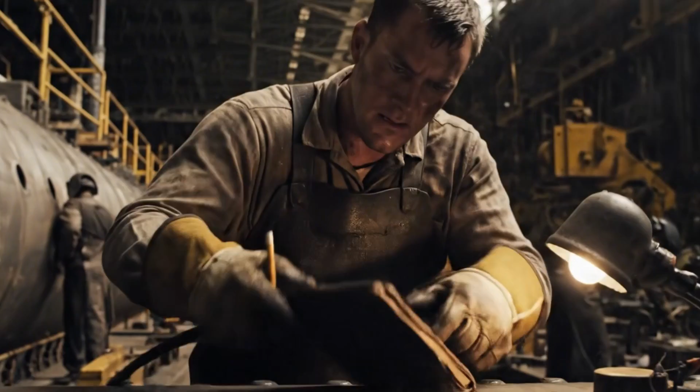"There has to be a better way. This is madness. The Navy supervisors kept telling me to work faster, but they refused to listen to my solution."

Through the maze of scaffolding beneath the wooden deck of a submarine under construction, he had just witnessed something that made his blood boil. A dozen workers spent an entire shift just to install a single section of deck planking. Enormous scaffolding structures filled the interior compartments below each wooden deck, with men working in cramped spaces, twisting nuts onto bolts that penetrated from above. Hours upon hours of labor just to secure wooden planks to steel frames.

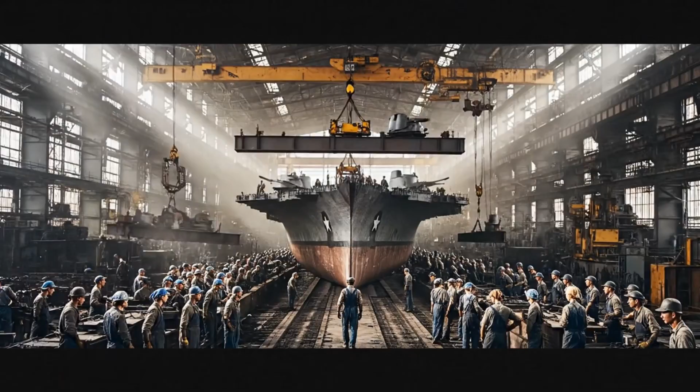The traditional method demanded precision, patience, and precious time that America did not have as war clouds gathered over the Pacific. Yet here, in what would soon become one of the busiest shipyards in the world, attachment methods were the same as they had been for decades.

Theodore Edward Nelson, 36 years old, California-born, had earned his mechanical knowledge the hard way. 15 years in machine shops across California, 15 years of learning how metal behaved, how electricity flowed, how problems could be solved if only someone would listen.

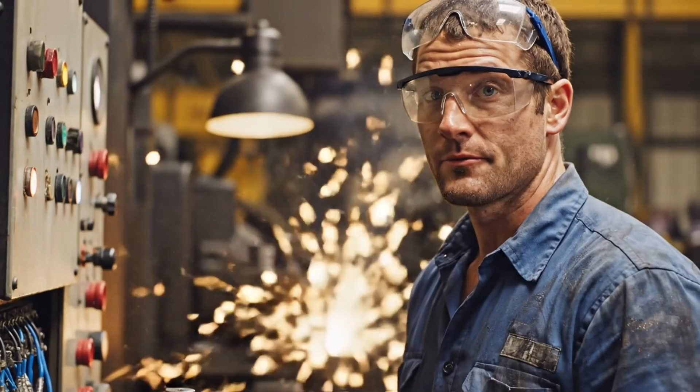What none of the Navy supervisors knew was that this frustrated welder had already solved their problem. And what Nelson did not yet know was that his simple solution, rejected and dismissed by his superiors, would soon save the United States Navy more than 50 million man-hours and fundamentally change naval construction forever.

The transformation had begun weeks earlier in the cramped interior spaces below decks, where the real war against inefficiency was being fought every single day.

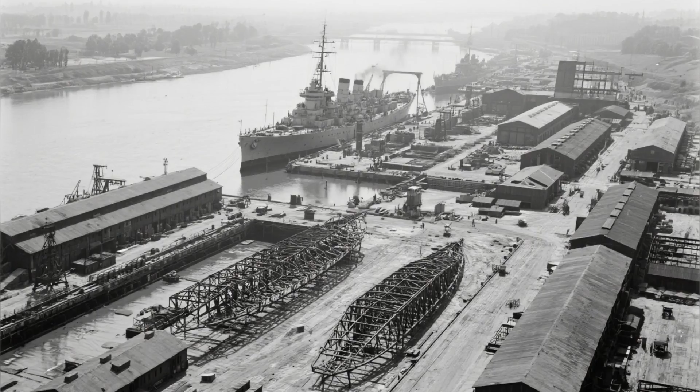The date was March 15th, 1941, 8 months and 22 days before Pearl Harbor. Mare Island Naval Shipyard stretched across 635 acres along the Napa River in Vallejo, California, 25 miles northeast of San Francisco. Founded in 1854 by Commander David Glasgow Farragut, it was the first United States Navy base established on the Pacific Ocean. By early 1941, Mare Island had evolved into the premier West Coast submarine construction facility.

The yard operated around the clock, 3 shifts of workers, 7 days a week. Submarine construction had accelerated dramatically as tensions mounted with Japan. The yard employed approximately 12,000 civilian workers in early 1941, a number that would eventually swell to nearly 50,000 by 1944.

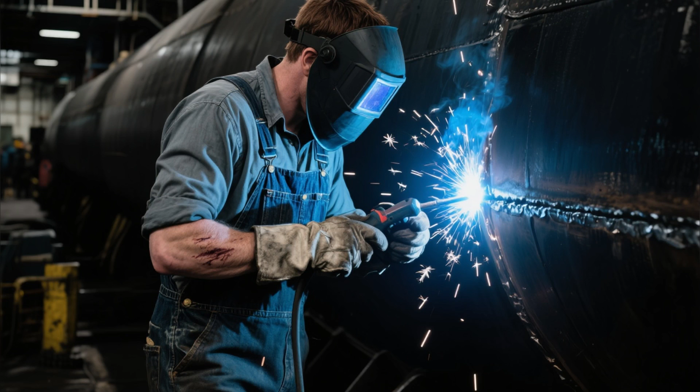Among those 12,000 workers was Ted Nelson, employee number 3,872. He earned $11 per day, working the day shift from 7 in the morning until 4 in the afternoon. His job was welding, primarily on submarine hulls and internal structures. He was good at his work, fast and precise, but increasingly frustrated by what he saw as wasteful inefficiency.

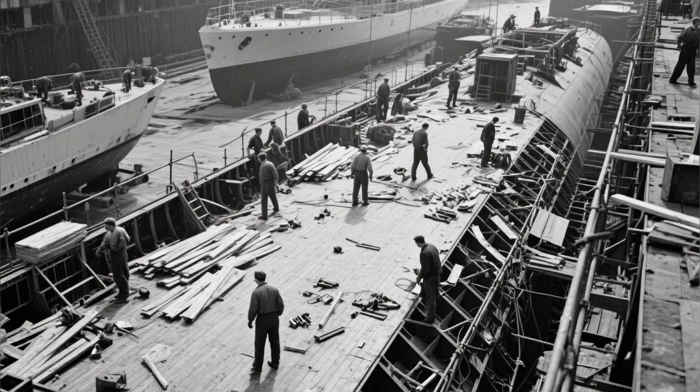The problem was everywhere he looked: wooden deck planking installation on submarines, destroyers, and aircraft carriers. The Navy specified wooden decks for several reasons. Wood provided better traction than steel in wet conditions, wood was quieter for crew movement, wood provided some insulation against the cold steel beneath, and in the event of fire, wooden decks could be more easily repaired or replaced than welded steel plates.

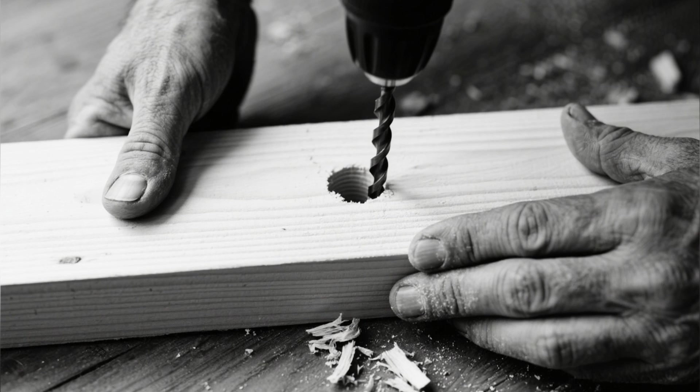But the installation method was archaic, labor-intensive, and painfully slow. The standard procedure, unchanged since the First World War, proceeded in a series of complicated steps. First, workers would drill holes through the wooden planks at precisely measured intervals. These holes would be countersunk to allow the heads of the attachment bolts to sit flush with the deck surface.

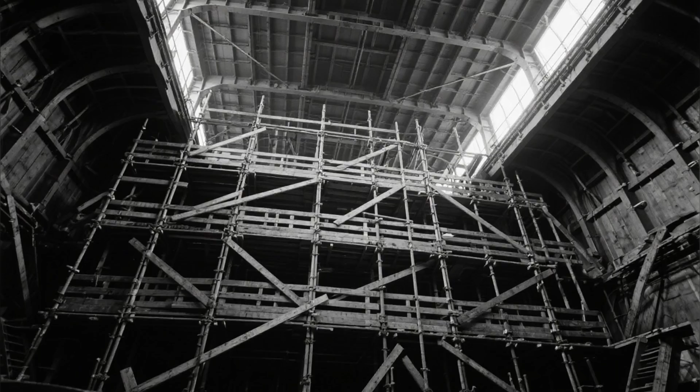Next, workers would position the planks on the steel deck framework. Then came the nightmare: workers had to construct extensive scaffolding beneath the deck inside the submarine or ship compartments. Multiple levels of platforms were required to give workers access to the underside of the steel deck framework. Once the scaffolding was in place, workers above and below would coordinate to insert long threaded bolts down through the wooden planks.

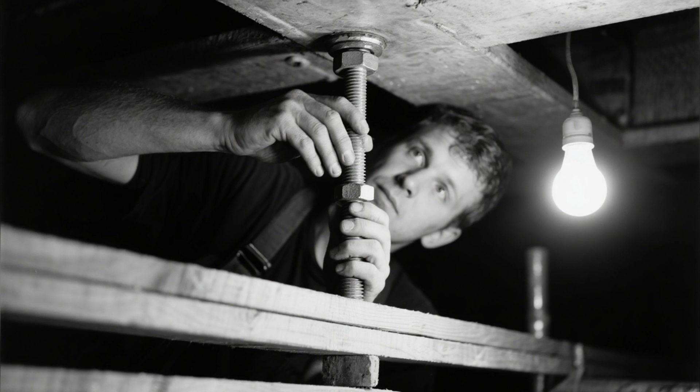And through corresponding holes in the steel framework, workers below, standing on scaffolding platforms in cramped, dark spaces, would thread nuts onto the protruding bolt ends. They would tighten these nuts with wrenches, pulling the wooden planks firmly against the steel framework above. Finally, workers topside would fill the countersink holes with wooden plugs, creating a smooth deck surface. The entire process was repeated for every section of decking on a submarine.

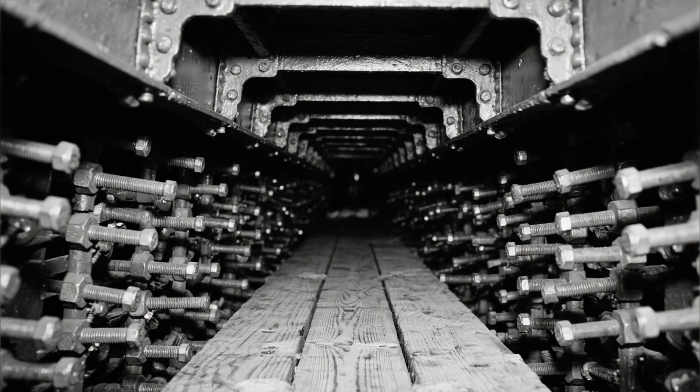There might be several hundred square feet of wooden decking requiring thousands of individual attachment points. On an aircraft carrier, the wooden flight deck covered tens of thousands of square feet. The labor requirements were staggering. A typical submarine deck installation required a crew of 12 to 16 men working for 5 to 7 days. The scaffolding alone took 2 full days to construct and another day to dismantle. The actual bolt installation consumed the remaining time.

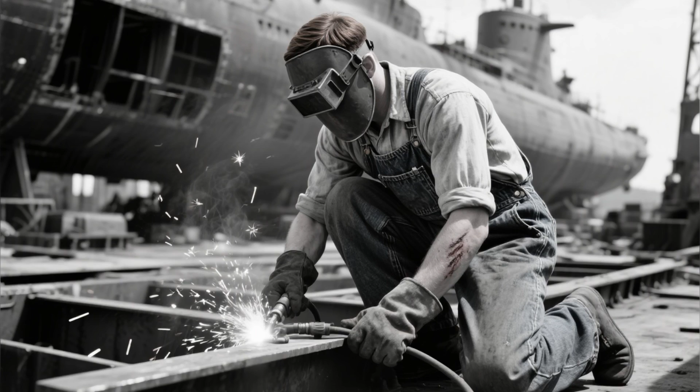Ted Nelson had performed this work dozens of times. He had spent countless hours standing on scaffolding platforms, threading nuts onto bolts in cramped submarine compartments barely 4 feet high. His back ached from the constant bending. His knuckles were scarred from slipped wrenches. His patience was exhausted, but more than personal discomfort drove his frustration.

He could see the bigger picture. War was coming. Everyone at Mare Island knew it. The yard was already behind schedule on submarine construction. The Navy needed boats in the water, not sitting in dry dock waiting for deck installation. Every day of delay was a day closer to a conflict America was not ready to fight. And Nelson knew there was a better way.

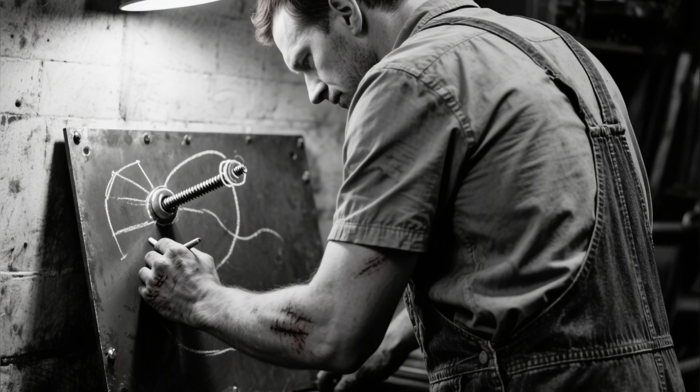He had been thinking about the problem for months, turning it over in his mind during the long hours of routine welding work. The solution seemed obvious to him. Instead of bolting from above and threading nuts from below, why not weld attachment studs directly to the steel framework? Weld from one side only, from above. No scaffolding required, no nuts and bolts, no workers cramped in compartments below, just fast, strong, permanent welds.

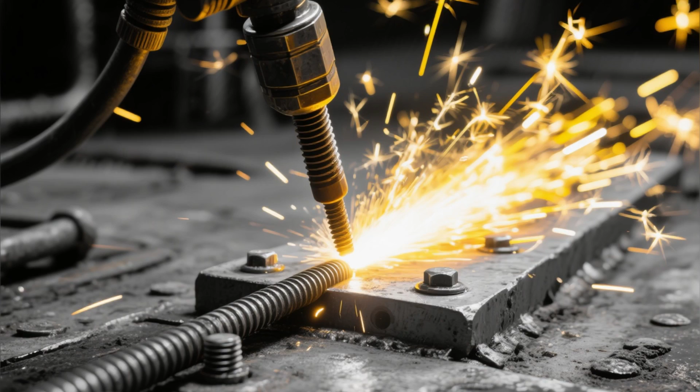The concept was simple. A threaded stud, essentially a headless bolt, could be welded to the steel deck framework in a fraction of a second. The wooden planks would have threaded inserts or specialized nuts to attach to these studs. The entire operation could be performed from the topside only. No scaffolding, no below-deck work, no coordination between crews above and below.

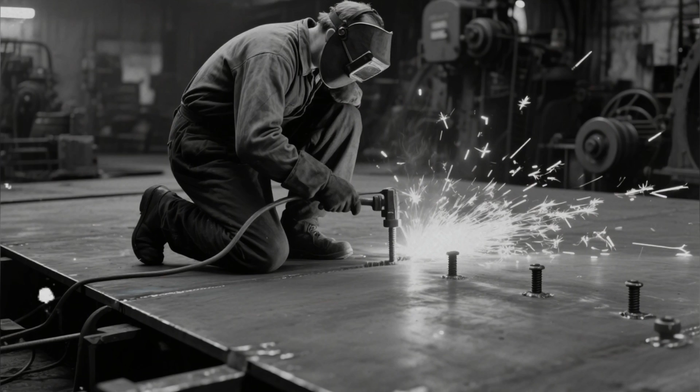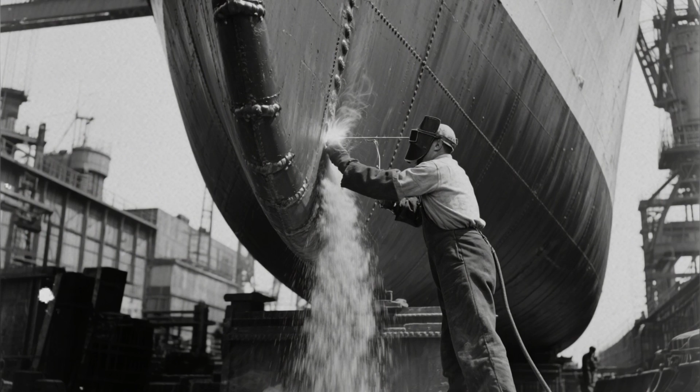Nelson had seen stud welding before in a limited form. The technology existed for horizontal flat plate welding. A small pile of flux powder would be placed on a flat steel surface. A stud would be positioned in the flux. An electrical arc would fuse the stud to the steel. But this method only worked on horizontal flat surfaces. The flux powder would simply fall off vertical or overhead surfaces, and naval construction required welding in all positions, vertical, horizontal, overhead, at all angles.

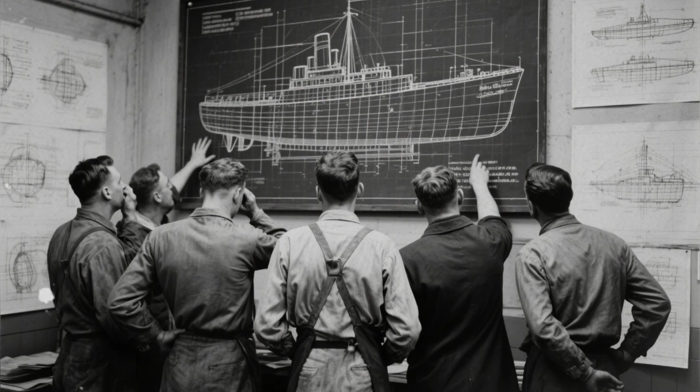This was the problem that had puzzled welding engineers for 20 years: how to make stud welding work on non-horizontal surfaces. Nelson thought he had the answer. It was so simple, he almost laughed when the solution came to him.

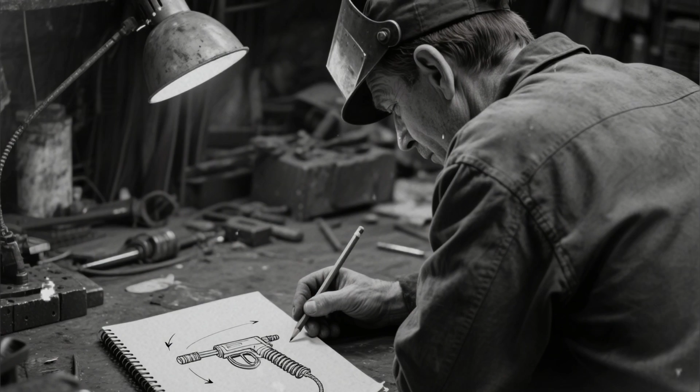Instead of loose flux powder, encase the flux in a small ceramic cap. Attach the cap to the end of the stud. The flux stays in place regardless of position. He sketched his idea in his notebook: a handheld welding gun, a spring-loaded mechanism to press the stud against the steel surface, an electrical trigger to create the welding arc, a disposable ceramic flux cap on the end of each stud. The whole operation would take less than 1 second per stud. One worker could install dozens of studs in the time it currently took to install a single bolted connection.

He took his idea to his supervisor, a Navy lieutenant named Morrison. The meeting lasted less than 5 minutes. Morrison barely looked at the sketches. "We have established procedures, Nelson. We follow Navy specifications. If you want to weld instead of supervising bolt installation, stick to your current assignments," he said. Nelson tried again, approaching the shipyard's chief welding engineer, a civilian contractor named Hartwell.

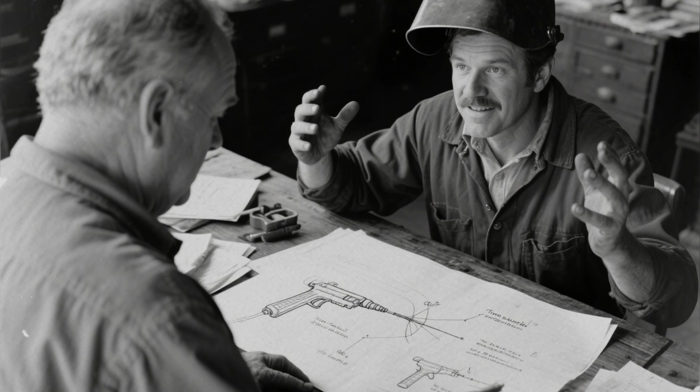He explained the time savings, the labor reduction, the elimination of scaffolding cost. Hartwell was more polite than Morrison, but equally dismissive. "Son, people a lot smarter than you and me have been trying to solve this problem for decades. If it was that easy, someone would have done it already. Besides, the Navy has specifications. We cannot just change procedures because a welder has an idea."

"You need approval from the Bureau of Ships in Washington. You need engineering studies. You need prototype testing. That takes years." "We don't have years," Nelson protested. "We need submarines now." Hartwell shrugged. "That's not my problem, Nelson. My problem is building boats according to approved specifications. Your problem is doing the welding work you're paid to do."

Nelson left the meeting angry and disillusioned. He had offered them a solution that could save thousands of hours per submarine.

They had dismissed him without serious consideration, not because his idea was flawed, not because it wouldn't work, but because he was just a welder, because changing procedures required paperwork and approvals, because innovation was less important than following established protocols.

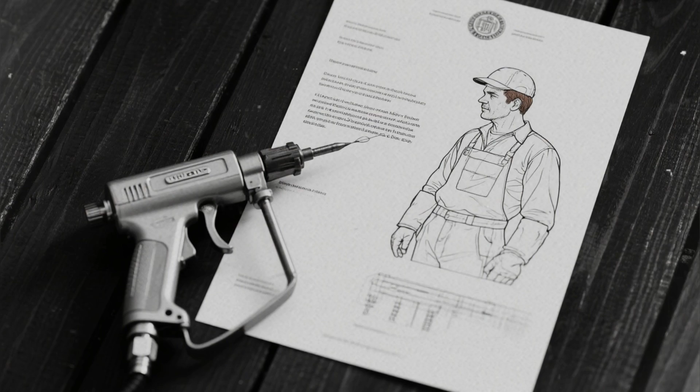He made one more attempt, writing a formal letter to the shipyard commander, Captain Thomas Withers. The letter was carefully composed, explaining the current inefficiency, proposing the stud welding solution, estimating time and cost savings. He submitted it through proper channels, following the established procedure for worker suggestions.

Three weeks later he received a reply, a form letter thanking him for his interest in improving shipyard efficiency, a polite explanation that all technical proposals were evaluated by the Bureau of Ships Engineering Review Board, a notation that his suggestion had been forwarded for consideration, a realistic assessment that the review process typically took 18 to 24 months. He would be notified if his proposal was approved for further study.

18 to 24 months. By then, the war might already be over or lost. Nelson crumpled the letter and threw it in the waste bin. That evening, he made a decision that would change his life and alter the course of naval history. If the Navy wouldn't listen, he would build it himself. He would prove his concept worked. Then they would have to pay attention.

He cleared a space in the garage behind his small cottage in Vallejo. His wife Emma watched with concern as he began collecting scrap steel and welding equipment. "Ted, you're going to get yourself fired," she warned. "You're supposed to be working on Navy projects, not your own inventions." "This will help the Navy," he replied. "They just don't know it yet."

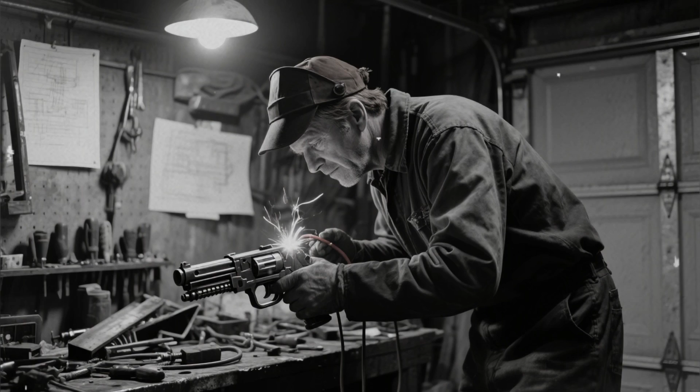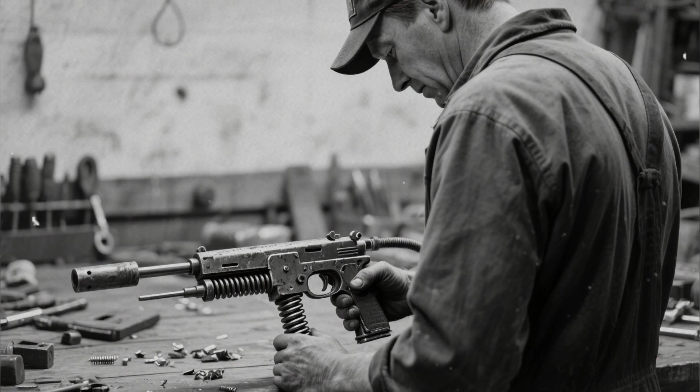Over the following weeks, working evenings and weekends, Nelson constructed his first prototype stud welding gun. The design was crude but functional: a pistol grip handle, a spring-loaded plunger to hold and press the stud, an electrical trigger connected to a welding power supply, and a quick-release mechanism to load new studs.

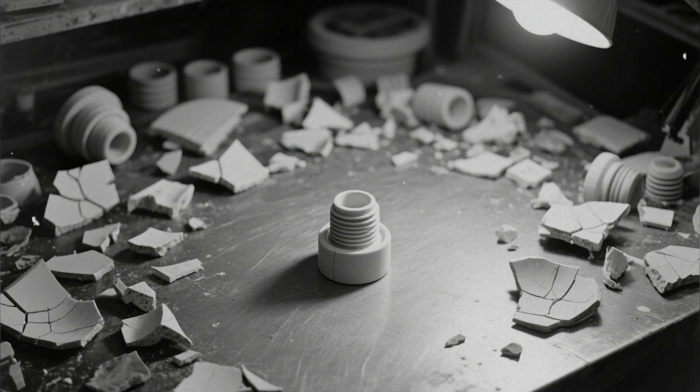The most critical innovation was the flux cap. He experimented with different ceramic materials, different flux compositions, and different cap designs. After dozens of tests, he developed a cap that held the flux securely, allowed proper arc initiation, and could be manufactured cheaply. By May 1941, he had a working prototype.

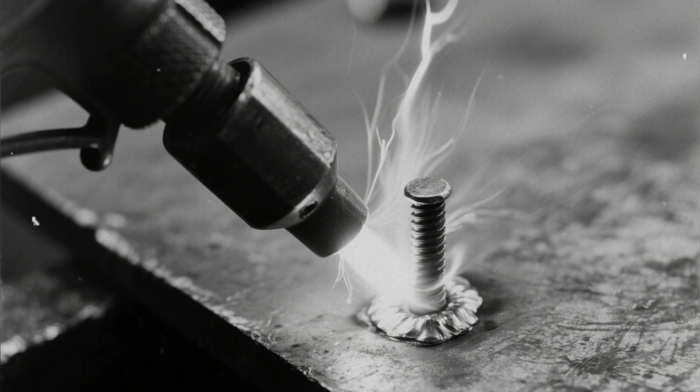He tested it on scrap steel in every position imaginable: horizontal, vertical, overhead, and angles. The gun worked flawlessly. A stud could be welded in less than one second. The weld strength exceeded that of traditional through bolts, and most importantly, it required no below-surface access.

He brought the prototype to work and demonstrated it to several fellow welders during lunch break. They were impressed and excited. "This is going to save us so much time," one remarked. "You need to show this to Morrison," another suggested. Nelson shook his head. "I already showed Morrison. He wasn't interested." "Then quit and start your own company," a third welder advised.

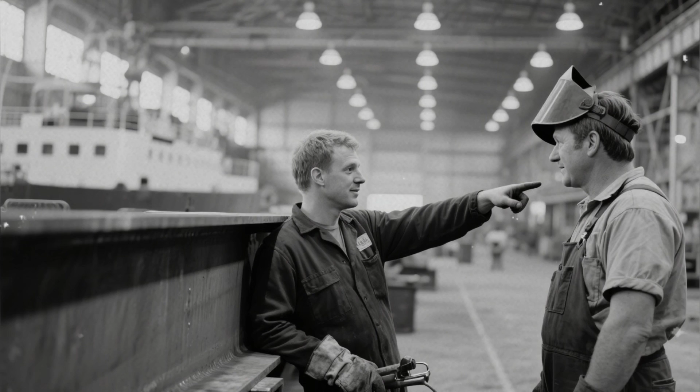"Sell your gun to shipyards across the country. You'll make a fortune." The idea had not occurred to Nelson. He was a welder, not a businessman. He had no capital, no manufacturing facility, no business experience. But the more he thought about it, the more sense it made. If the Navy wouldn't use his invention, maybe private shipyards would.

The Kaiser shipyards in Richmond were hiring. The Bethlehem Steel Shipyard in San Francisco was expanding. There were shipyards up and down the West Coast, all facing the same labor shortages and production pressures. On June 20th, 1941, Ted Nelson submitted his resignation to Mare Island Naval Shipyard.

His supervisor tried to talk him out of it. "Nelson, you're a good welder. Don't throw away a steady job for some crazy invention." But Nelson's mind was made up. "I'm going to build welding guns," he told Morrison. "And when the Navy comes back asking to buy them, I hope you remember this conversation."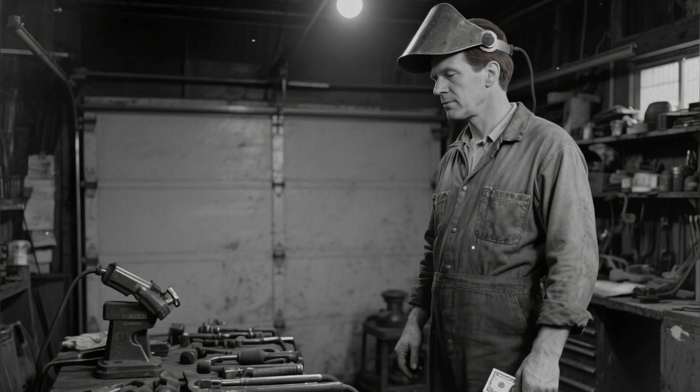He left Mare Island with $11 in his pocket, a garage full of tools, and a conviction that his invention would succeed. He incorporated the Nelson Specialty Welding Equipment Corporation on July 1st, 1941. He borrowed $95,000 from the Reconstruction Finance Corporation, a government lending agency established during the Depression to support small businesses. With that capital, he rented a small workshop in Vallejo and began manufacturing stud welding guns.

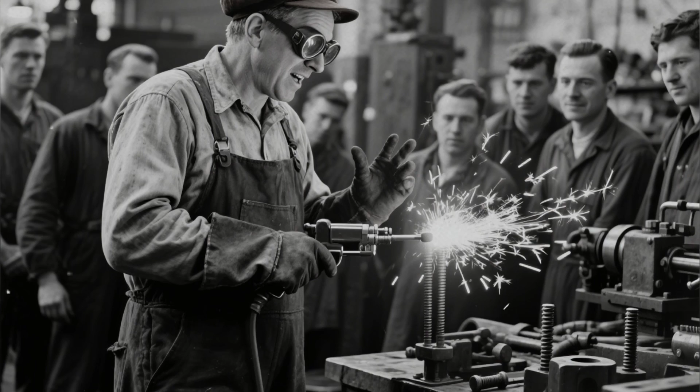The first months were difficult. He had no customers, no reputation, no distribution network. He made sales calls to local machine shops and small fabrication companies, demonstrating his gun and explaining the time savings. Most were skeptical. A few were interested enough to try a demonstration unit. Slowly, very slowly, orders began to come in.

By September 1941, he had sold 18 welding guns and several thousand flux cap studs. Then, on December 7, 1941, everything changed. Pearl Harbor. The Japanese attack destroyed or damaged 8 battleships, 3 cruisers, 3 destroyers, and 188 aircraft. 2,403 Americans died. The United States was at war.

Suddenly, shipbuilding was not just important, it was a matter of national survival. Within days of Pearl Harbor, the shipbuilding industry exploded into frantic activity. The Kaiser shipyards began building Liberty ships at an unprecedented pace. Mare Island Naval Shipyard received emergency orders for submarine construction. Bethlehem Steel and other private yards started working triple shifts. And every single one of these facilities faced the same problem: how to build ships fast enough. The traditional methods were too slow, too labor-intensive, too wasteful of precious time.

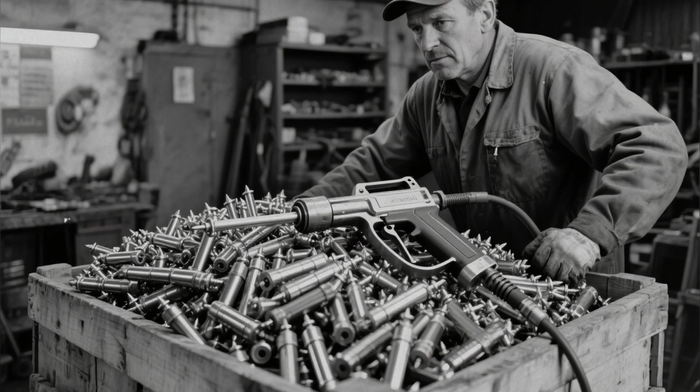Ted Nelson's phone began ringing. Shipyard purchasing agents who had dismissed his invention weeks earlier now wanted to place large orders. The Kaiser shipyards ordered 50 welding guns and 10,000 studs. Bethlehem Steel ordered 40 guns. Even Mare Island Naval Shipyard, where he had been rebuffed just months earlier, placed an order for 60 guns and 20,000 studs. Morrison, his former supervisor, handled the purchase requisition. There was no apology, no acknowledgement that Nelson had been right, just a terse official order and a request for prompt delivery.

By January 1942, less than 1 month after Pearl Harbor, Nelson's small workshop could not keep up with demand. He was receiving orders faster than he could manufacture products. He needed a real factory, more workers, better equipment. He leased a larger facility in San Leandro, a few miles south of Oakland. The building sat in the middle of a cornfield, isolated and unimpressive, but it had space, power, and room for expansion.

By March 1942, he employed 20 workers. By June, 50. By September, 150. The factory operated around the clock, 7 days a week. Welding guns rolled off the assembly line at a rate of 30 per day. Stud production reached thousands per day.

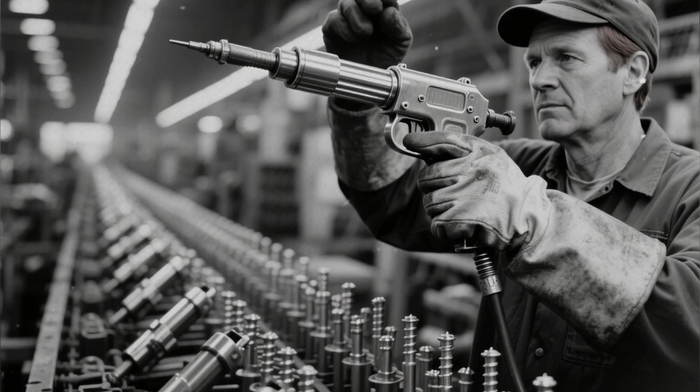Every major shipyard on the West Coast was now using Nelson's stud welding equipment, and the reports coming back were extraordinary. A submarine deck installation that previously required 12 workers in 6 days could now be completed by 3 workers in 1 day. The elimination of scaffolding saved 2 additional days and freed workers for other tasks. The welds were stronger than traditional bolted connections. The wooden deck planks could be removed and replaced more easily for maintenance or repair.

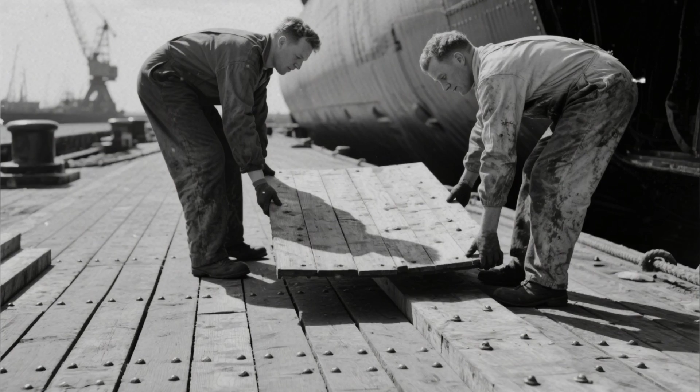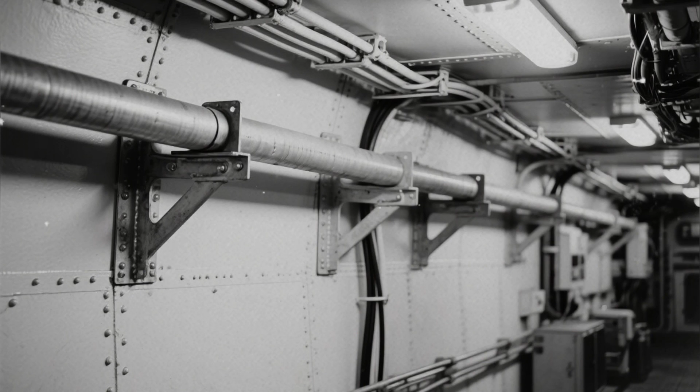At Mare Island Naval Shipyard, submarine construction accelerated dramatically. The yard completed 17 submarines between 1941 and 1945, with an average construction time that steadily decreased as new techniques were implemented. Stud welding was not the only innovation, but it was a critical piece of the efficiency puzzle. By mid-1942, stud welding was being used not just for deck attachment, but for dozens of other applications: pipe hangers, cable supports, equipment mounts, bulkhead attachments. Any situation where a fastener needed to be attached to a steel structure, stud welding provided a faster solution.

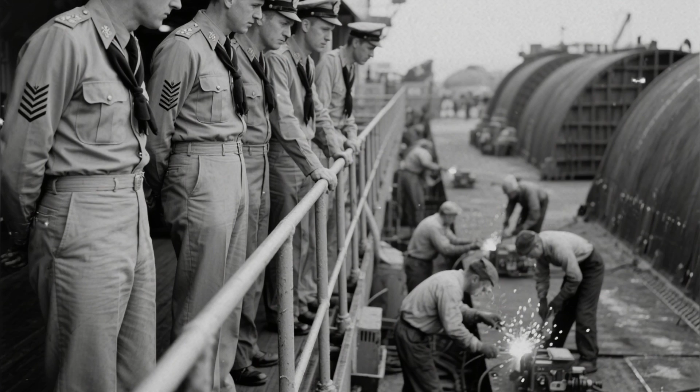The Navy Bureau of Ships, which had initially ignored Nelson's proposal, now studied his process intensively. Engineering teams analyzed weld strength, durability, and failure modes. The results confirmed what Nelson had known all along. His welds were not just faster than traditional methods, they were actually superior in strength and reliability.

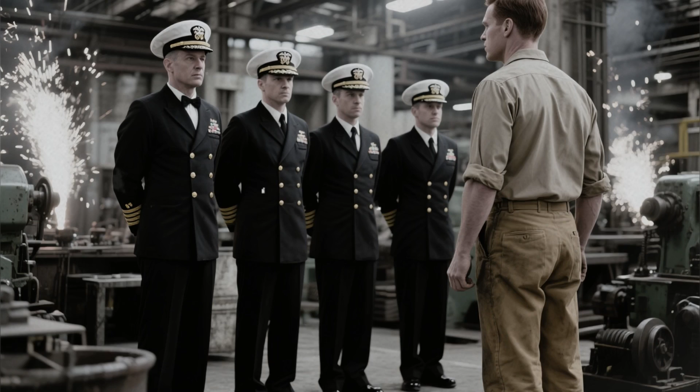On November 19, 1942, just 11 months after leaving his $11 a day welding job, Ted Nelson received a formal visit from a delegation of Navy officers. They came to his San Leandro plant unannounced, a group of 4 men in dress uniforms. Captain Harrison, representing the Bureau of Ships, did the talking.

"Mr. Nelson, we are here to inform you that the Navy has completed an evaluation of your stud welding process. We have determined that your invention has saved the United States Navy an estimated 5 million man-hours in submarine and surface ship construction over the past 10 months. That number is expected to increase substantially as more shipyards adopt your technology." He paused, then continued. "On behalf of the Secretary of the Navy and the United States government, I am authorized to present you with a citation for exceptional contribution to the war effort."

Nelson was stunned. They had rejected his idea. They had ignored his proposals. They had forced him to quit his job and risk everything to prove his concept. And now they were giving him a citation.

Captain Harrison must have seen the conflict on Nelson's face.

"I understand you submitted a proposal to Mare Island in early 1941, Nelson. I have reviewed that file. Your proposal was not properly evaluated at the time. That was a mistake, and I apologize on behalf of the Navy. However, your decision to develop the technology independently has resulted in faster deployment than would have been possible through the normal procurement process. Sometimes the best way to serve your country is to ignore official channels and just solve the problem."

Nelson accepted the citation with mixed emotions: pride in his achievement, vindication for his perseverance, but also frustration at the bureaucracy that had nearly prevented this innovation from happening.

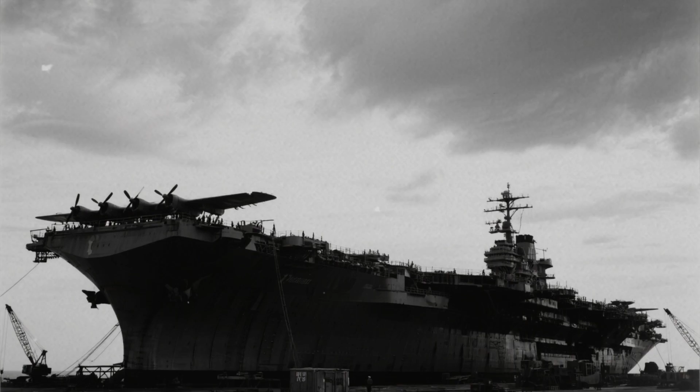The war continued. Production demands increased. Nelson's company expanded again, opening a second manufacturing facility in Camden, New Jersey in March 1943. This East Coast plant supplied shipyards in New York, Philadelphia, Norfolk, and Charleston. By mid-1943, Nelson's Specialty Welding Equipment Corporation employed over 400 workers and generated annual revenue of approximately $4 million.

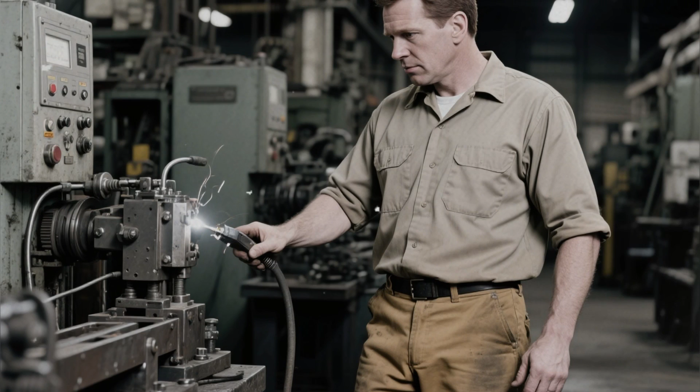Nelson still spent 16 hours a day in the factory, still dressed in shop workers' tan pants and shirts, still drew a modest salary of $1,000 per month. All profits were reinvested in expansion, equipment, and loan repayment. But his impact on the war effort was incalculable.

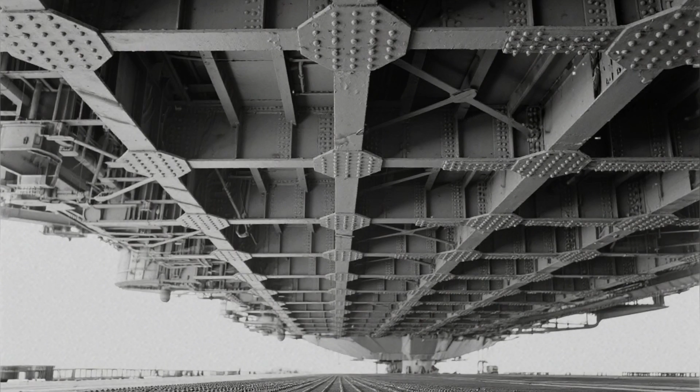The Navy's estimate of 5 million man-hours saved by late 1942 was just the beginning. As the war progressed and stud welding became standard practice across all naval construction, the time savings multiplied exponentially. By 1943, stud welding was being used not just on submarines, but on aircraft carriers, battleships, cruisers, destroyers, and hundreds of smaller vessels. The Essex-class aircraft carriers, built by Newport News Shipbuilding and other yards, used Nelson's stud welding extensively for flight deck attachment and interior fittings.

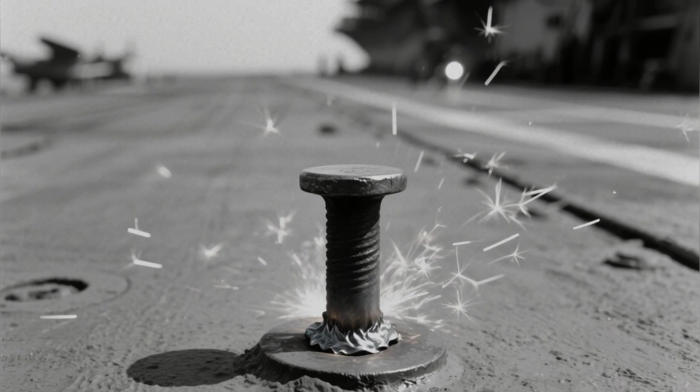Each carrier required approximately 20,000 studs. The Navy built 24 Essex-class carriers during the war. The Iowa-class battleships used stud welding for deck planking, equipment mounts, and armor attachment. The Baltimore-class heavy cruisers incorporated the technology throughout. Destroyer escorts, landing ships, patrol boats, every type of naval vessel benefited from faster, stronger attachment methods.

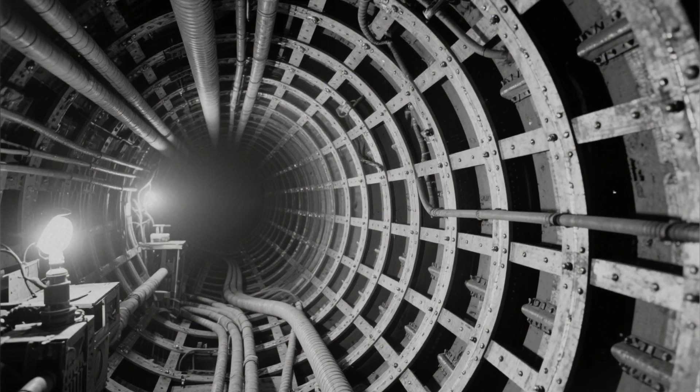But the most dramatic impact was in submarine construction. Mare Island Naval Shipyard, where Nelson had worked and where his idea had been rejected, became one of the most efficient submarine builders in the world. The yard built 17 submarines during the war, with steadily improving construction times. Portsmouth Naval Shipyard in New Hampshire became the champion submarine builder, completing 79 submarines between July 1940 and July 1945.

Portsmouth's success was built on multiple innovations, but stud welding was a critical enabling technology. The yard adopted Nelson's system extensively, using it not just for decking, but throughout the boat's interior. The result was visible in construction statistics. Portsmouth launched 3 submarines simultaneously on January 27, 1944: the Redfish, Ronquil, and Razorback. A 4th submarine, Scabbardfish, launched the same day. Four submarines in one day, no shipyard before or since has matched that achievement.

At the peak of production, Portsmouth completed 30 submarines in 1944, approximately 1 submarine every 11 days. The Balao-class submarines, which made up the bulk of wartime production, averaged 12 months from keel laying to commissioning at Portsmouth. This was several months faster than other yards building the same class.

Electric Boat Company in Groton, Connecticut, built 74 submarines during the war. Manitowoc Shipbuilding in Wisconsin, despite being on the Great Lakes hundreds of miles from the ocean, built 28 submarines that were floated down the Mississippi River to the Gulf of Mexico. Across all yards, the United States built 203 submarines during World War II.

Each submarine required thousands of stud-welded attachments. Each stud saved minutes of labor time. Multiply those minutes by thousands of studs per submarine, by hundreds of submarines, and the time savings reached staggering proportions. But submarines were only part of the story. The real volume was in surface ships and merchant vessels.

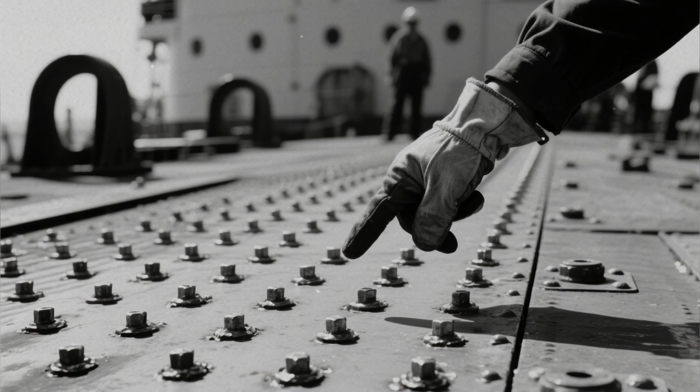The Liberty Ship program, managed by the Maritime Commission and built primarily at Kaiser shipyards, produced 2,710 cargo ships during the war. Each Liberty ship required approximately 5,000 to 8,000 stud-welded attachments for deck planking, cargo handling equipment, defensive gun mounts, and ship fittings. The Victory ships, a faster and more advanced design, were built to similar standards. The scale of production was unprecedented in human history.

At the peak of Liberty ship construction in 1943, American shipyards launched 3 new ships every day, 75 ships per month, 900 ships per year. This was possible only through radical innovations in construction methods: prefabrication, modular assembly, specialized workers, dedicated tools, and faster attachment methods. Stud welding was one piece of a larger revolution in shipbuilding efficiency, but it was a critical piece. The elimination of scaffolding freed workers for other tasks.

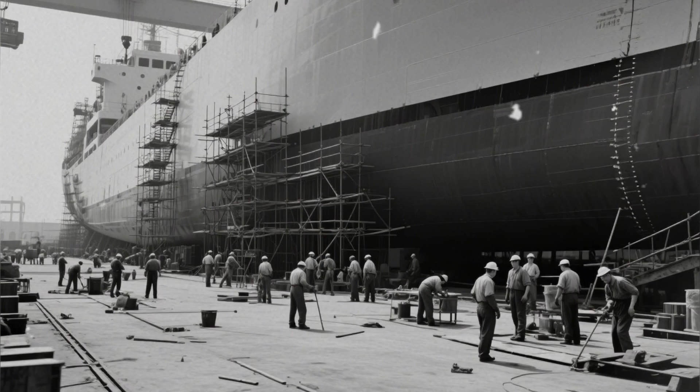The speed of installation reduced assembly time. The strength and reliability of the welds ensured that these hastily built ships could survive North Atlantic storms and enemy attacks. By the spring of 1943, the United States Navy had taken formal notice of Nelson's contribution.

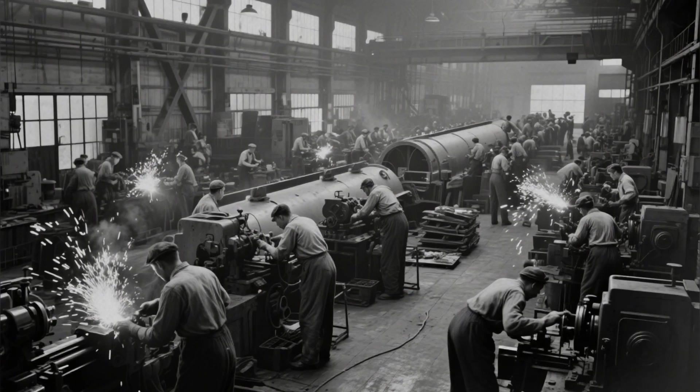On May 11, 1943, the Secretary of the Navy presented the Nelson Specialty Welding Equipment Corporation with the Army Navy E Award for Excellence in Production. The E Award was created in July 1942 to recognize companies whose production facilities achieved outstanding performance in manufacturing war equipment. Excellence in quality and quantity were the determining factors. Only about 5% of companies engaged in war work received this honor.

The award consisted of a pennant for the factory and individual pins for all employees. The ceremony was held at the San Leandro plant with full military honors. Navy officers, Army representatives, and local officials attended. The factory workers, Nelson's employees, who had worked grueling hours to meet production demands, received their pins with pride.

Ed Nelson, standing before his workers in his usual shop clothes, accepted the pennant and gave a brief speech: "We didn't do this for awards or recognition. We did this because our country needed it. Every stud we make, every gun we build, helps bring our sailors and soldiers home safely. That's all the reward we need."

But the Navy was not finished recognizing Nelson's achievement. Plants that maintained outstanding performance for 6 months after receiving the initial E Award were granted a star to add to their pennant. The Nelson Company earned its first star in November 1943. The second star came in May 1944. By the end of the war, the Nelson Specialty Welding Equipment Corporation had earned 2 E Awards with stars, one of only a handful of companies to achieve this distinction.

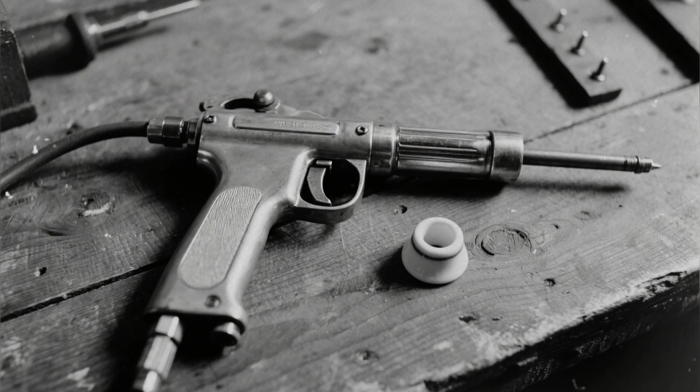The time savings translated directly into ships in the water faster. More submarines hunting Japanese convoys, more destroyers escorting convoys, more aircraft carriers launching strikes, more landing ships delivering Marines to hostile beaches. Every ship delivered faster meant more combat power, more supplies delivered, more lives saved. The strategic impact was incalculable.

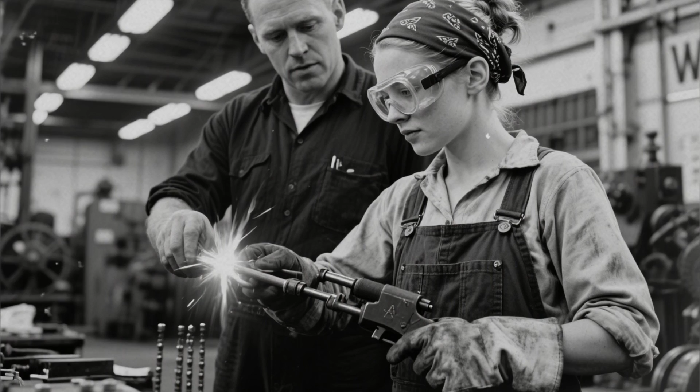But Nelson's invention had another unexpected benefit. The stud welding process required less skill than traditional bolt installation or conventional welding. With minimal training, new workers could perform stud welding operations safely and effectively. This was crucial as the war progressed and labor shortages intensified.

Women entered the shipyards in unprecedented numbers. The famous Rosie the Riveter symbolized female shipyard workers, but there were also Wendy the Welders. Women operated stud welding guns, installed deck planking, mounted equipment. Many became highly skilled at the process.

Mare Island Naval Shipyard, at its peak, employed almost 50,000 workers, including 9,000 women. Kaiser shipyards employed hundreds of thousands, with women making up nearly 30% of the workforce. These women needed tools and processes that could be learned quickly and performed safely. Stud welding fit that requirement perfectly.

By 1944, the tide of war had turned decisively in favor of the Allies. American industrial production overwhelmed Axis capabilities. The United States built more ships, planes, tanks, and guns than Germany and Japan combined. The arsenal of democracy, as President Roosevelt called it, operated at full capacity.

Ed Nelson's stud welding guns were a small part of this massive industrial achievement. But small parts matter. In war, efficiency is measured in lives saved and battles won. Faster ship construction meant more naval power deployed sooner. More naval power meant more Japanese shipping sunk, more islands taken, more pressure on the enemy.

The submarine campaign in the Pacific demonstrated this clearly. American submarines sank over 1,000 Japanese merchant ships, totaling approximately 5 million tons. They also sank 8 aircraft carriers, 1 battleship, and numerous cruisers and destroyers. This success was possible only because America built submarines faster than Japan could sink them.

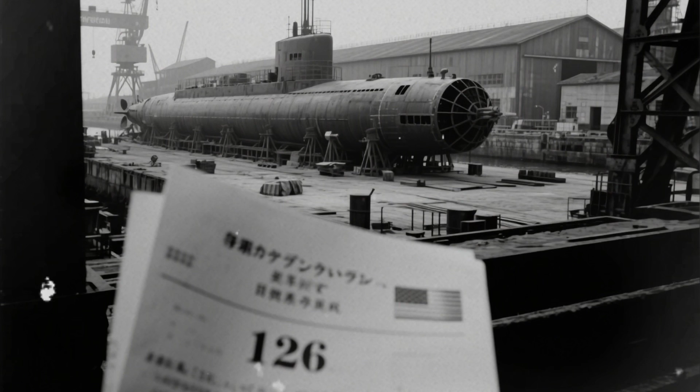Japan began the war with a larger submarine fleet than the United States, but Japan built only 126 submarines during the war. America built 203. Every month of accelerated construction mattered. Every week a submarine reached the fleet sooner meant another week hunting enemy shipping. The Essex-class aircraft carrier program showed similar patterns. The United States Navy had 7 aircraft carriers in December 1941.

By August 1945, the Navy had 99 aircraft carriers of all types. The Essex-class fleet carriers formed the backbone of this force. 24 were completed, each carrying up to 90 aircraft.

The fast carrier task forces built around Essex-class carriers dominated the Pacific. From mid-1943 onward, these ships shelled Japanese positions, launched airstrikes, provided air cover for amphibious landings, and engaged Japanese naval forces in decisive battles. The Battle of the Philippine Sea in June 1944 saw American carrier aircraft destroy over 600 Japanese planes in what pilots called the Great Marianas Turkey Shoot.

This victory was possible only because America had more carriers in the right place, at the right time. Faster construction enabled faster deployment.

The D-Day invasion of Normandy on June 6, 1944, required 7,000 ships and landing craft. This armada, the largest amphibious assault in history, was possible only because American and British shipyards built landing craft by the thousands. The landing ships were crewed vessels, flat-bottomed boats designed to run up on beaches and discharge cargo, but they required rapid construction and reliable fittings.

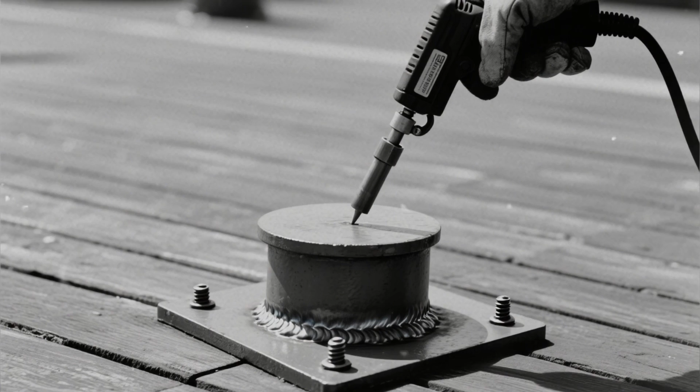Stud welding proved ideal for landing craft construction. Cargo ramps, davit mounts, deck fittings all could be installed quickly and securely. Nelson's technology, invented for submarine deck attachment, found applications throughout the landing craft fleet.

After V-E Day in May 1945, attention shifted fully to the Pacific. The planned invasion of Japan, Operation Downfall, was scheduled for November 1945. The operation would require more ships, more landing craft, more logistics support than any previous campaign. Shipyards prepared for another surge in production.

Then, on August 6 and 9, 1945, atomic bombs destroyed Hiroshima and Nagasaki. Japan surrendered. On August 15, 1945, World War II ended. The massive military production machine began winding down. Contracts were canceled, workers were laid off, and shipyards closed or converted to peacetime production.

The Nelson Specialty Welding Equipment Corporation faced an uncertain future. Military orders dried up almost overnight. The company, which had employed over 400 workers at its peak, now faced potential collapse.

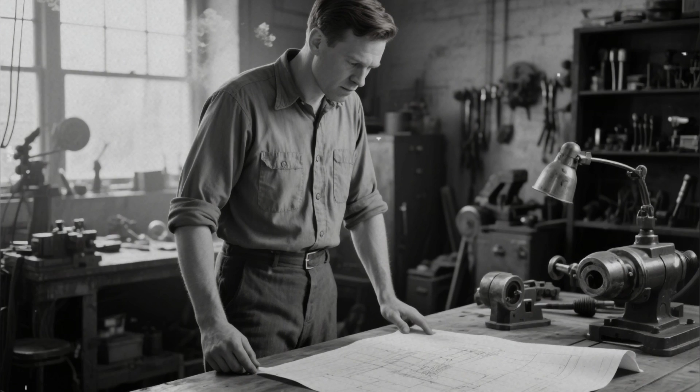But Ted Nelson had prepared for this moment. During the war years, he had been thinking about peacetime applications for stud welding. The technology was not limited to shipbuilding. Any industry that fabricated steel structures could benefit from faster attachment methods: construction, bridges, buildings, tanks, pressure vessels, automotive. The possibilities were extensive. Nelson pivoted to civilian markets.

He marketed his stud welding systems to construction companies, steel fabricators, and industrial manufacturers. The post-war construction boom provided new opportunities. America was building highways, bridges, skyscrapers, and suburbs, all of which required steel fabrication and attachment.

By 1948, Nelson's company had successfully transitioned to peacetime production. The business was smaller than during wartime, but stable and growing. The company continued to innovate, developing new stud designs, improved welding guns, and specialized applications.

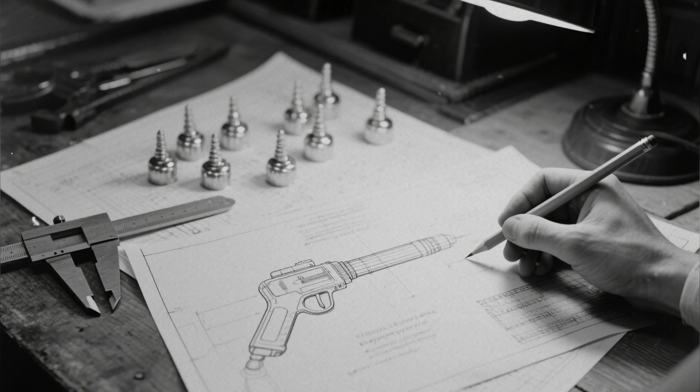In 1950, Nelson sold his company to TRW, a large industrial conglomerate. The sale made Nelson financially secure and allowed him to retire from active management. But the Nelson name remained on the product. TRW continued to market Nelson's stud welding equipment, maintaining the brand recognition Nelson had built.

Over subsequent decades, the company changed hands several times. TRW sold to Fastenal Incorporated in 2000. Doncaster's Group Limited acquired Fastenal in 2007. Stanley Black & Decker purchased the industrial division in 2018. Through all these changes, the Nelson brand survived. Today, Stanley Engineered Fastening manufactures and markets Nelson stud welding products globally. The technology pioneered by Ted Nelson in his garage in Vallejo remains in use worldwide.

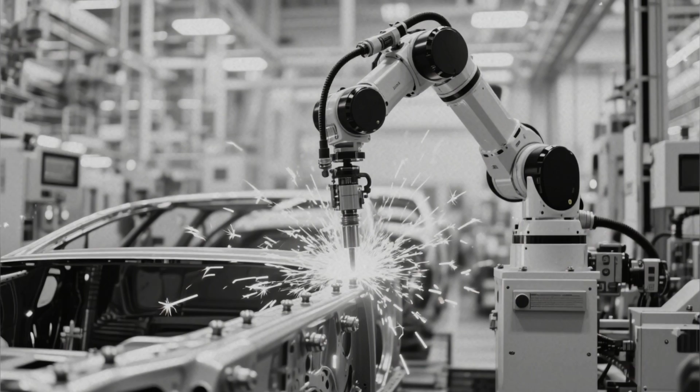Modern stud welding is more sophisticated than Nelson's original design. Inverter power supplies provide precise arc control. Automated systems handle high-volume production. Robotic welders apply studs in automotive assembly plants. But the fundamental principle remains the same: a stud, a flux cap, a spring-loaded gun, and an electrical arc, one second per stud, no scaffolding required.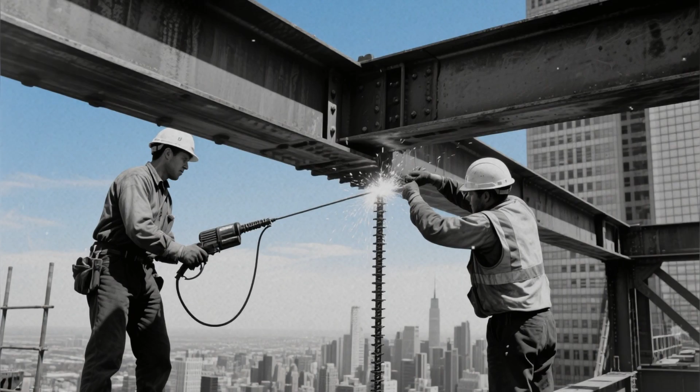The applications have expanded far beyond shipbuilding. Construction workers use stud welding to attach metal decking to steel beams in skyscrapers. Bridge builders use it for guardrail posts and lighting mounts. Nuclear power plants use it for cable trays and equipment supports. Automotive manufacturers use it throughout vehicle bodies for grounding points and trim attachment.

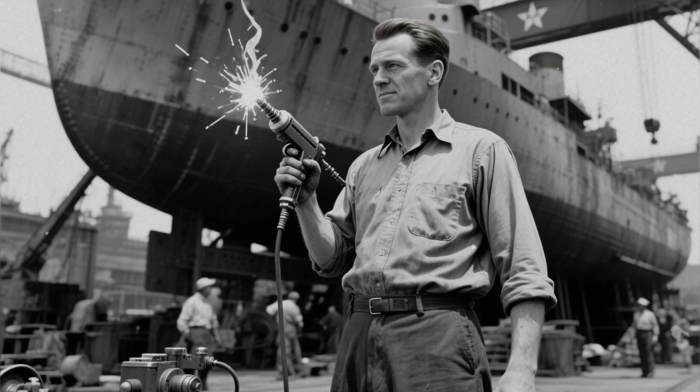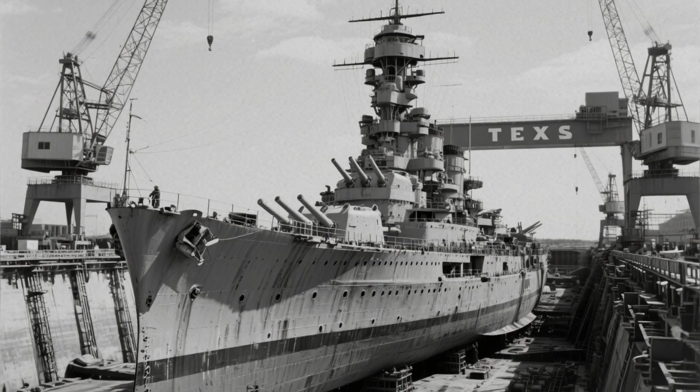The technology Nelson invented to solve a naval construction problem has found applications in virtually every industry that works with steel. But the most touching legacy of Nelson's invention is found in the restoration of historic ships. The battleship Texas, one of only two remaining ships to have served in both World Wars, is currently undergoing restoration at a dry dock facility. The ship requires extensive work to repair corroded hull plates and deteriorated fittings.

The restoration team discovered that modern Nelson stud welding equipment is ideal for this work. They could attach new steel plates using the same technology Ted Nelson invented 80 years ago. Similarly, the submarine USS Pampanito, a World War II boat now preserved in San Francisco, uses Nelson stud welding for ongoing maintenance. The boat sits at the Embarcadero, hosting over 100,000 visitors annually. Keeping the old boat safe and functional requires constant attention. Nelson equipment allows the volunteer restoration crew to perform welding work efficiently, without requiring certified welders for every task.

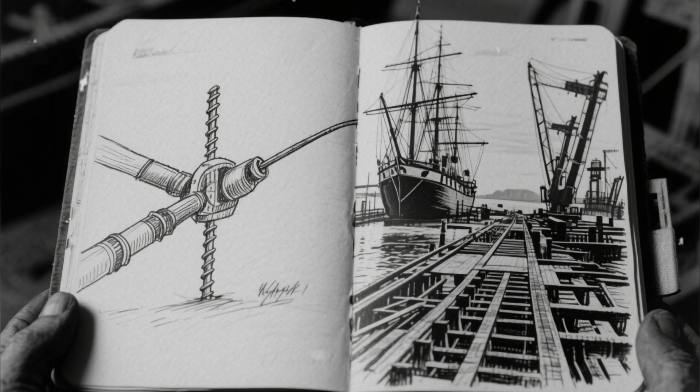Did Nelson live to see his invention's impact extend far beyond what he imagined that day in 1941, when he sketched his idea in a notebook? He saw stud welding become standard practice in shipbuilding. He saw it adopted by industries worldwide. He saw his name become synonymous with the welding process. He died in 1994 at the age of 89, having lived long enough to witness the end of the Cold War and the transformation of the world his generation had fought to preserve.

The statistics of his achievement tell only part of the story: 50 million man-hours saved, two Army Navy awards, thousands of ships built faster, billions of studs manufactured. But numbers cannot capture the full impact. Behind those statistics were sailors who returned home because their submarine was completed in time to join the fleet, Marines who survived because landing craft were available for their assault, families who were not torn apart because the war ended sooner. The true measure of innovation is not just efficiency gained, but lives preserved. Ted Nelson, the $11 a day welder who was told his idea was impractical, saved more lives than many combat heroes. He did it not with weapons, but with welding, not through destruction, but through construction.

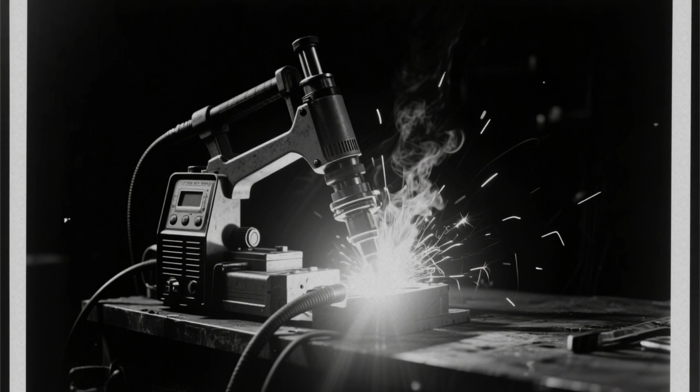The rejection he faced was not unique. History is filled with innovators dismissed by established authorities. Wilbur and Orville Wright were told powered flight was impossible by experts. Henry Ford was laughed at for suggesting automobiles could be mass-produced. Chester Carlson spent years trying to sell his xerography process before finding a buyer.

What made Nelson different was his refusal to accept rejection. He didn't argue with bureaucrats. He didn't waste time trying to convince skeptics. He simply quit his job, risked his savings, and proved his concept worked. Then the market did the convincing for him. This is the essence of American innovation: not waiting for permission, not following established procedures, not accepting that things must be done the way they have always been done, just identifying a problem, developing a solution, and having the courage to implement it regardless of institutional resistance.

Mare Island Naval Shipyard, where Nelson worked and where his idea was rejected, closed in 1996 after 142 years of service. Over its lifetime, the yard built 512 ships and repaired thousands more. The yard was responsible for construction of 44 submarines, including the last nuclear submarine built in California, USS Drum, launched in 1970. The base was declared a California Historical Landmark in 1960, and parts were designated a National Historic Landmark District in 1975.

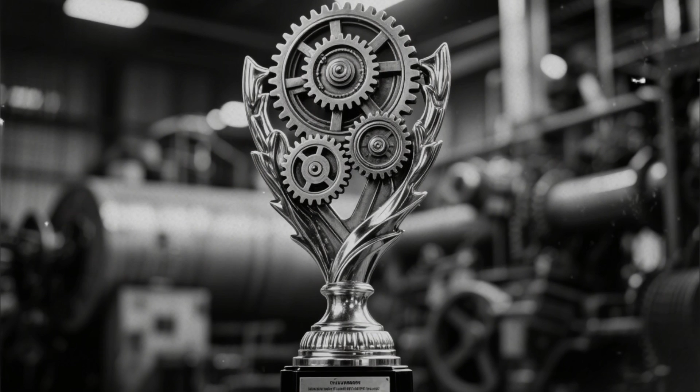But there is a lesson here for every generation. Innovation often comes from unexpected places, not from credentialed experts, but from working people who see problems every day and know how to fix them, not from corporate research labs, but from garage workshops where tinkerers experiment until they find solutions, not from official channels, but from individuals willing to risk everything on an idea they know is right.

The next great innovation might come from a welder in a shipyard, a mechanic in a garage, a nurse in a hospital, a teacher in a classroom. It might come from someone official channels dismiss as unqualified, someone bureaucrats tell to follow procedures, someone experts assure is wasting time on an impossible problem. History suggests we should listen to these people, not because all their ideas will work, but because the occasional idea that does work can change everything.

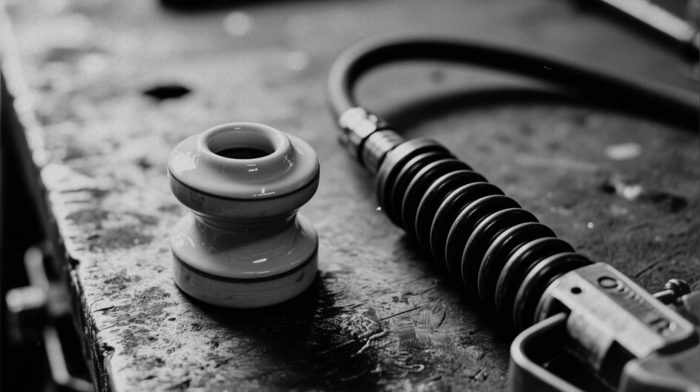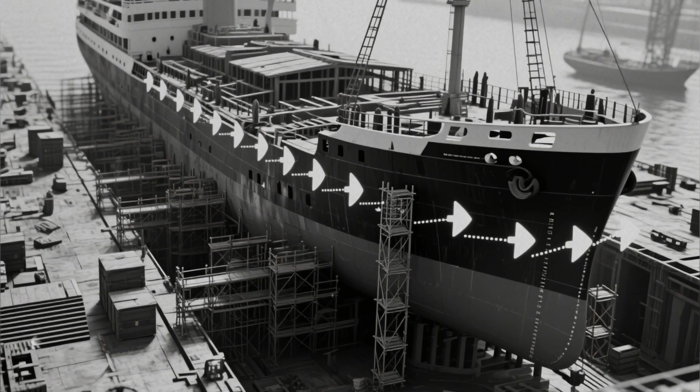Ted Nelson's ceramic flux cap was just a small piece of ceramic. His welding gun was just a simple spring-loaded tool. But combined, they eliminated scaffolding, saved time, increased safety, improved quality, and accelerated ship production at a critical moment in history. 50 million man-hours, 5,700 years—that's what one welder's rejected idea ultimately saved.

And that number represents only the direct construction time savings. It doesn't account for the strategic impact of faster ship deployment. It doesn't measure the lives saved because submarines reached the Pacific sooner. It doesn't calculate the morale boost from seeing production goals exceeded. It doesn't quantify the deterrent effect of American naval power growing faster than enemies anticipated. The full impact of Ted Nelson's invention may never be fully calculated, but we can say with certainty that America's victory in World War II depended on industrial capacity as much as military valor.

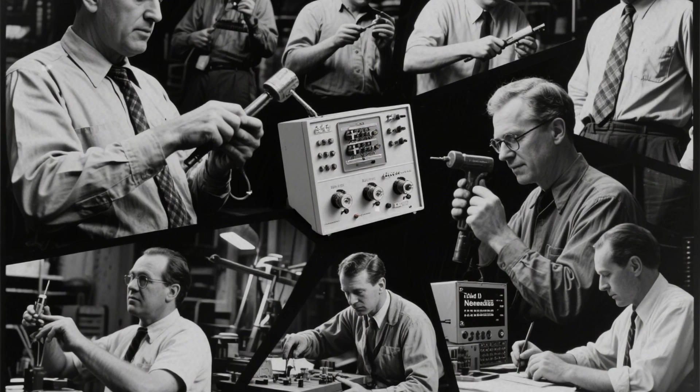The battles were won by soldiers, sailors, and Marines. But the war was won by workers, engineers, and innovators, people like Ted Nelson who saw a problem and fixed it, who refused to accept inefficiency when efficiency was possible, who understood that in total war every minute saved in production translated to lives saved in combat.

As we face the challenges of the 21st century, this lesson remains relevant. The problems we confront—climate change, resource scarcity, infrastructure decay—require innovation at every level. Solutions will come not just from elite universities and corporate laboratories, but from working people who see problems clearly and develop practical fixes. The next Ted Nelson might be designing a better solar panel in a garage workshop.

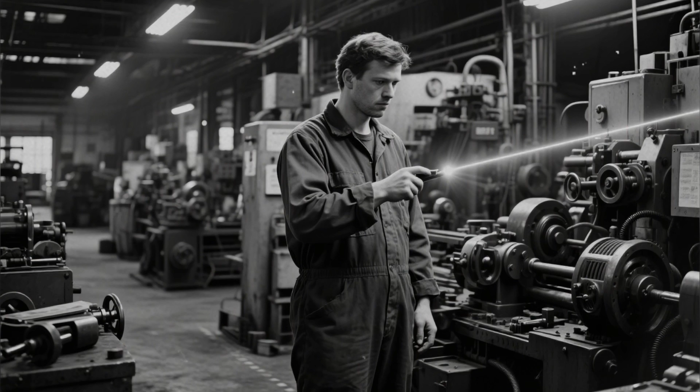The next breakthrough might come from a factory worker who knows exactly what's wasting time and energy. The next revolution in efficiency might originate with someone official channels have already dismissed as unqualified. We need to listen. We need to encourage innovation from all sources. We need to reduce the barriers between problem identification and solution implementation. We need to remember that some of the most important innovations in history came from people working outside the system because the system refused to listen.

Ted Nelson started as an $11 a day welder. He ended up as a millionaire industrialist whose technology saved his country. But he never forgot his roots. He never put on airs. He never claimed to be anything more than a mechanic who saw a problem and fixed it. In his later years, when asked about his success, he would shrug and say, 'I just made a better mousetrap. The world beat a path to my door.'

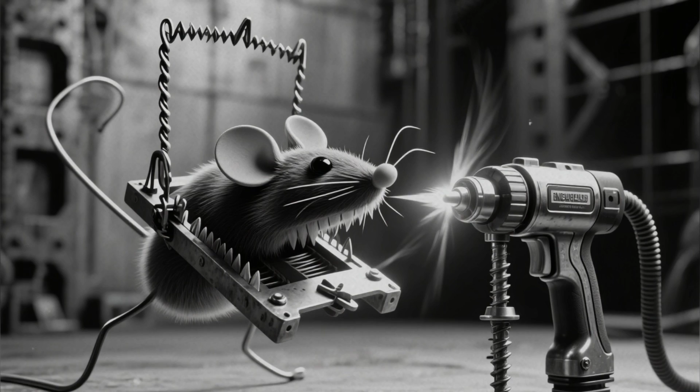That legacy lives on every time a welder pulls the trigger on a stud welding gun, every time a ship is built faster than the old methods allowed, every time someone looks at an inefficient process and asks, 'There has to be a better way.' Ted Nelson asked that question in 1941. His answer helped win a war. What questions are you asking today?

And more importantly, when the experts tell you it cannot be done, when the bureaucrats tell you to follow procedures, when the skeptics dismiss your idea, will you have the courage to prove them wrong? The history of innovation suggests that sometimes the most important thing you can do is ignore the experts, trust your own observations, and build the solution you know will work. Ted Nelson did exactly that.

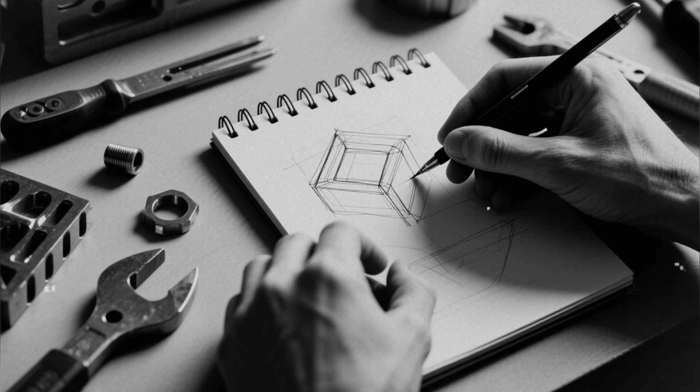80 years later, welders around the world still use his invention every single day. And somewhere, perhaps in a garage or workshop, the next Ted Nelson is sketching an idea that everyone says won't work. But they will be wrong, because the best innovations don't come from following procedures. They come from people who see a problem, know how to fix it, and refuse to take no for an answer.